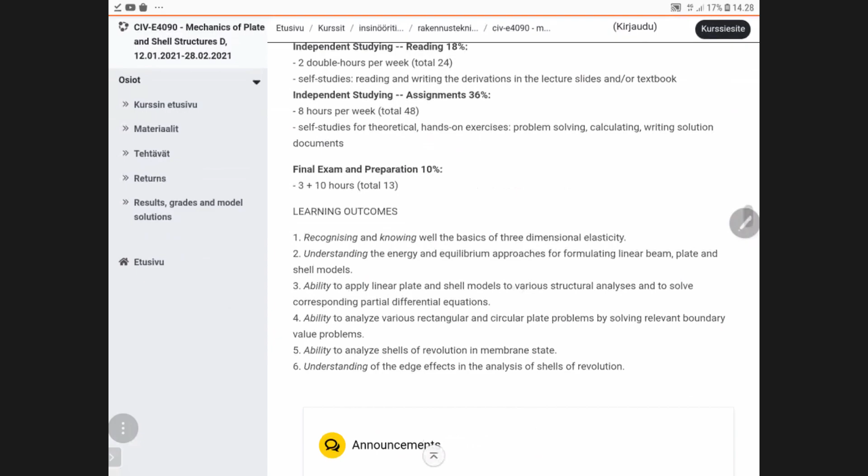And sometimes if we are not reducing that, then the course feels quite heavy to you. Okay, but anyway, now I presume that some of you study only 2 courses per period. If you study 3, then you better know that it's a lot.

And of course, the official amount of credits you get if you study every second period 2 courses, every second 3. But I think that in the past, at least, we used to study during the summer and Christmas period, so that some of the examinations you are taking there - this is the way to lower your workload during the periods. So this period system is a little bit heavy if you study only during the periods.

Okay, here the learning outcomes: recognize and know the basics of 3-dimensional elasticity. Of course, we start from that because all the structural models are based on 3D, and then we go to 2D and 1D. Understanding the energy and equilibrium approaches.

So 2 approaches, which I will explain a little bit later, for formulating linear beam, plate, and shell models. Ability to apply linear plate and shell models to various structural analyses and solve corresponding partial differential equations. Of course, hand calculations without any numerical tools - we are not able to solve too many or too complex problems, but enough, I think.

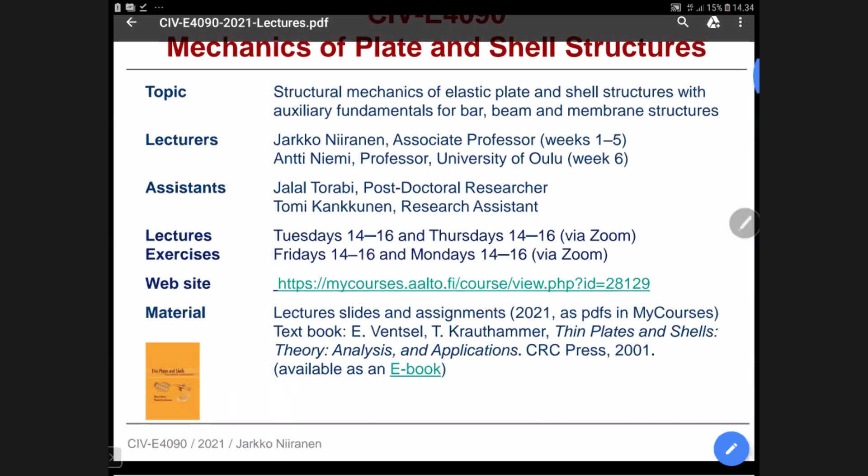So the rest should be clear. Maybe you can go through those on your own. And then once again, you don't have to listen to the lectures, you don't have to come to the exercise sessions. You can study on your own if you will.

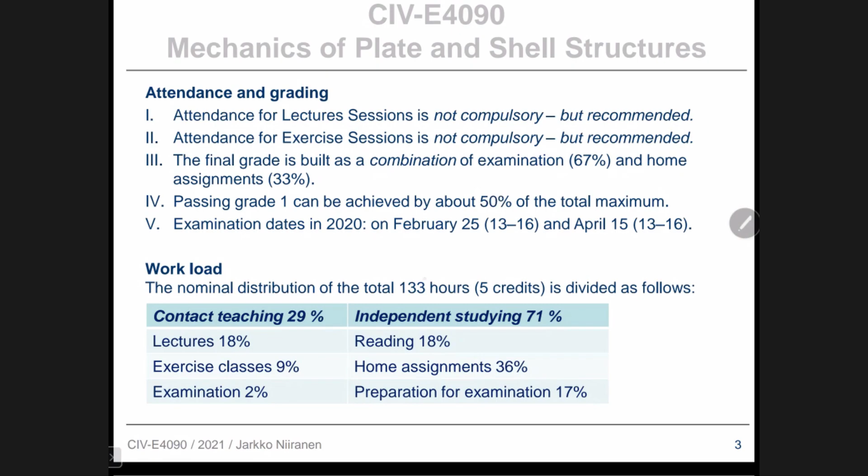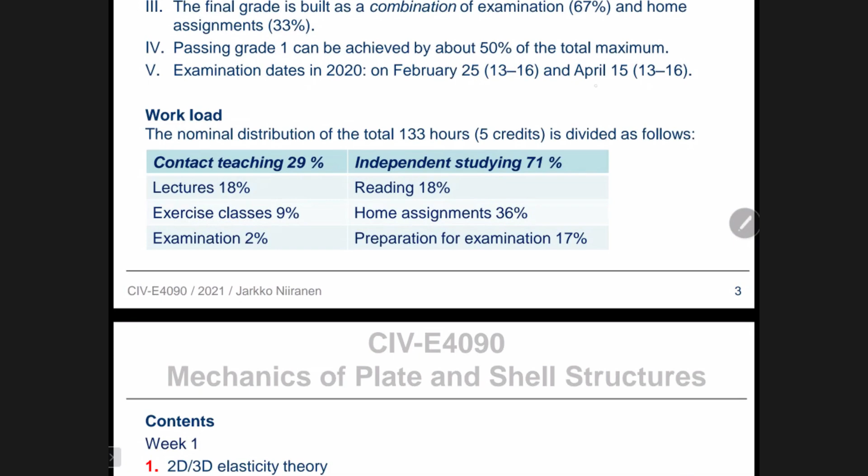It's a combination of examination, a bit more now since we don't have computer exercises, and assignments. Passing grade is a preliminary guess of 50%, but it always depends on how difficult the exercises and exams finally turn out to be. There's another exam in April, after the course. This is maybe should be updated.

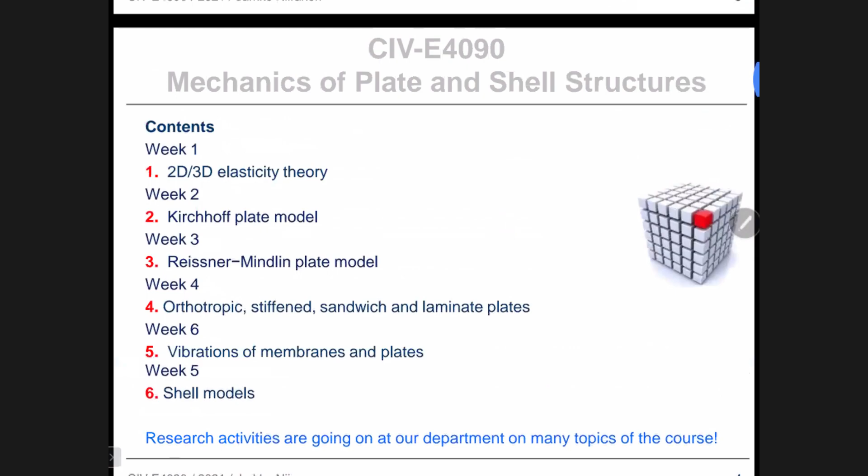Okay, and here once again the content. Now, do you have anything about practicalities? Anything to ask? Any questions?

Could it be so, like in the engineering computation and simulation course, that it would be a 50-50 split between homework and exam? Why do you mean that—could it be like that? Yeah, could it be? Well, of course it could be.

What do you think? How about others? Is it too much if the examination is—I mean, if the exercises are only 30?

Well, it's a good idea to increase exercise weight, so we have more chances to pass the course at least. But of course the target is not just to pass the course—the target is to get a good comprehension of the course. But yeah, maybe increasing the weight of the homework would be good.

Okay, maybe once I've tried something like this, I don't know, actually I don't remember anymore. But so what should it be? Should it be 50, or what should it be? What do you suggest—50 or 40, or now it's about 30, or was it a third?

Actually, I have one quick question regarding the homework. Is it okay to just use pen and paper and then scan a clear picture of the answers? Yeah, nothing else is required.

Some of you, even in the exam, used maybe Word or some other writing software, but I actually recommend using pen and paper, especially in exercises. Sometimes it might be difficult to read, but usually I think it helps in learning. There are even rigorous studies on the fact that using your hand increases brain activity as well.

Okay, but it's anything goes, so it doesn't have to be so formal, nice reports.

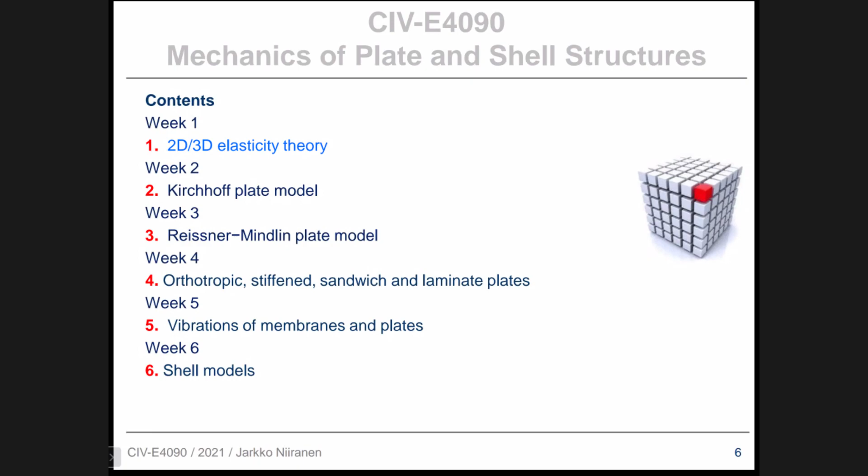Okay, let's go to the topic then. Is there still somebody who wants to ask? I think some of the exercises will be identical, especially now it's a very standard classical topic. Some exercises you just have to go through calculations people have done for let's say at least 50 or 100 years, some small examples, so you don't have to apply, you just go through things. Of course, in some exercises I add a little bit of a twist, so that you are not able to just copy the model solutions or others you can find on the internet or in textbooks.

Maybe I had it somewhere, maybe it's coming. Okay, let's see. Anyway, first we are going through the strong and weak forms for 3D linear elasticity. We are recalling a little bit, and then actually I should have added here 2D as well, and then it's coming, plane strain and plane stress problems.

These are the fundamental problems that are behind the membrane, plate and shell formulations. You should recognize the differences between the dimensions and understand the basic features, and have the ability to solve some model problems.

By the way, have you been able to download the book? Anybody tried? Yes. Okay, so it works. Is it so that you can download the whole book or just some fractions of that?

Well, you can download either, but the maximum period is 7 days, and after that the files are not working, you need to download it again, as you are borrowing it again. That's the online ebook.

Or type that book name into Google. Don't use any Aalto, Finna, or anything like that. Well, there's another free option, a PDF, yeah, you can find a cracked PDF definitely. But I think that when it came to us, I actually downloaded the whole book and it's still working. I don't know, maybe they have changed the license.

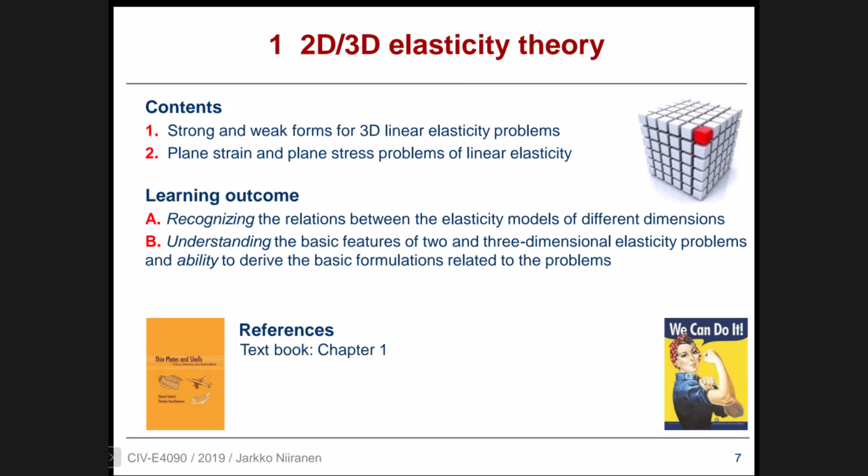By the way, remember always to use the VPN connection or some other connection so that you can get access to those library materials.

And then, of course, I just list here that we are relying on the basic course material, and some courses of bachelor's you have studied continuum mechanics. I don't know how much, depends on your background, but at least in Aalto we have one course, and then we have a course of, maybe I should have written here also the course of solid mechanics. So I think we have two courses. Of course, statics and dynamics is always kind of the high school extension, but it's not about the continuum, solid bodies, it's kind of rigid bodies.

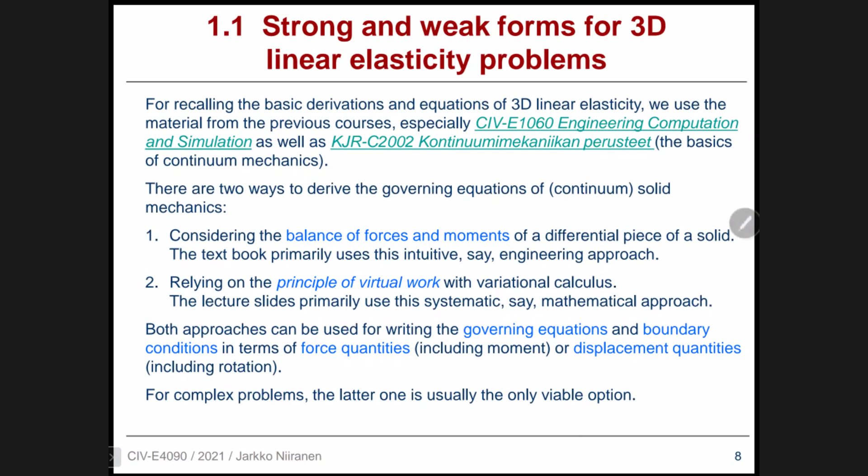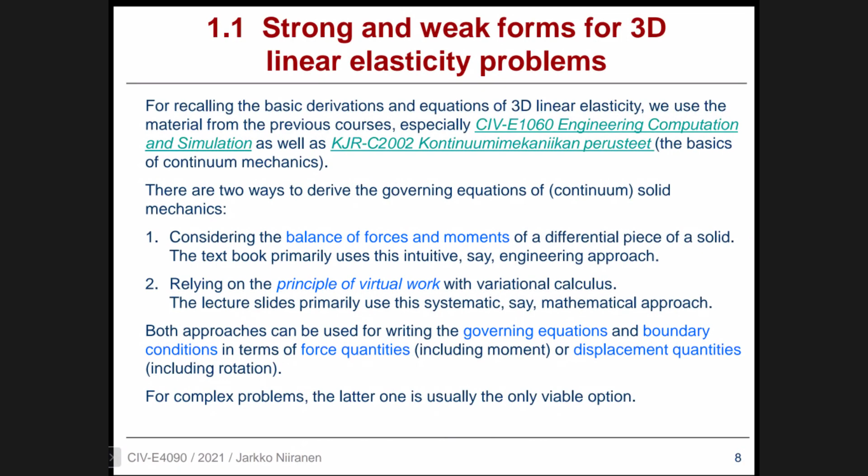And now there are two ways. I have now used number 2 here, and I'm using that in the slides, especially because the book is using number 1. So what I mean here, maybe I can, I don't know.

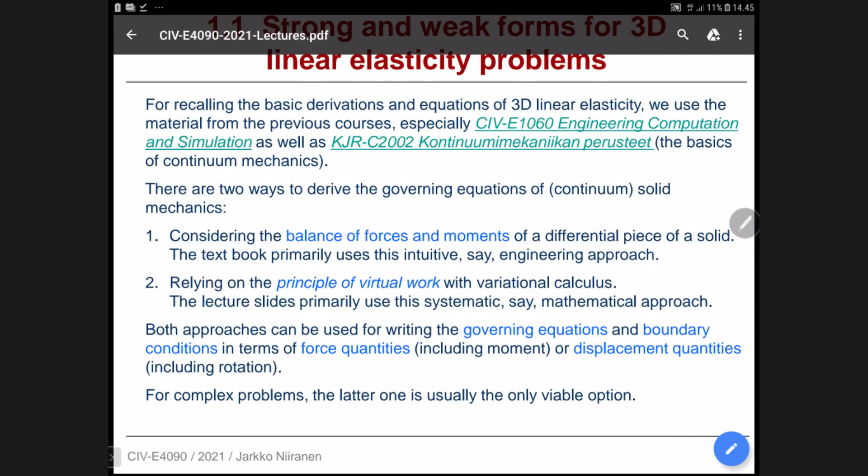Where is my drawing system here? What I mean is usually, like we did in some exercises, we draw this kind of dx, a short piece of material, and you can do it in 3D. And then you write balance equations and all these things, and then you say, okay, let's see what will be the differential equation.

And the other way is that we start from the integral form, and then we plug in or insert all the kinematical assumptions and things like that, and see what happens. So this is the way I'm using here in the slides, and of course both are possible, but usually in more complex problems the first one is not a viable option. It's too complicated, and you easily make mistakes.

Okay, so these are the two ways of working, and I try to build a link between these two during the lectures a little bit, to give you a direction. But when I'm giving you the reading exercises, you will get to option 1, number 1.

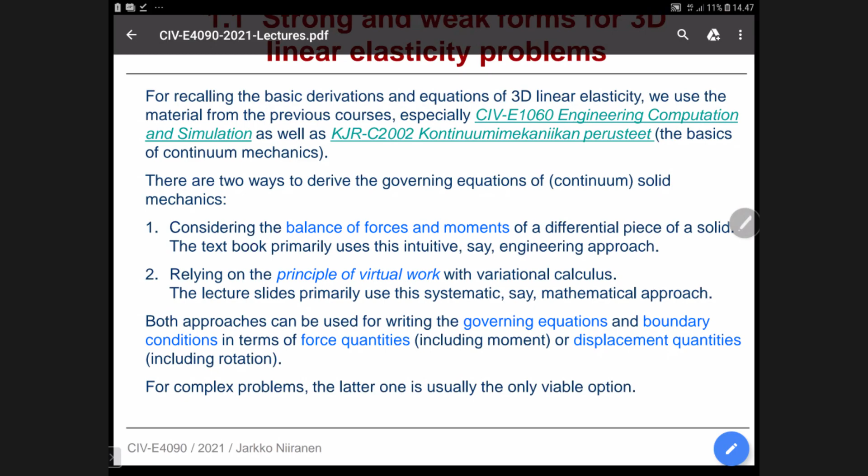Now if we go back to the previous studies, especially the basic course, what I'm recalling is that we were modeling something, and the physical problem is always the starting point, but it's very often too complicated, so we have to make some reductions. The first reduction is, let's say, that now you are here.

Let's say that you have multiphysics. In structural engineering, it's not very multiphysical stuff, but in general you have multiphysics in the problem setting. Then you go to monophysical, which is our case—of course it's only mechanics, but it can still be 4D. And then we go to 3D, and then we might go to 2D, and finally 1D in some cases.

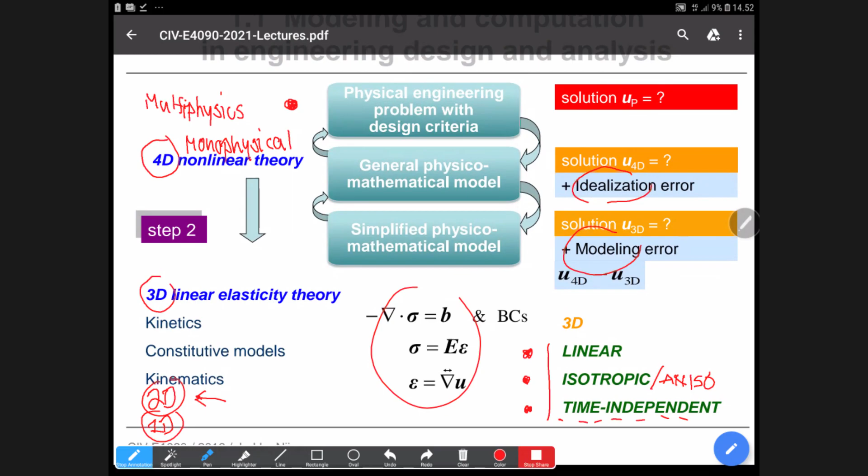Okay, so this is the concept, and now it's all about idealization or modeling error, nothing about discretization. Maybe in the end I'm showing you a little bit about some practical tools, especially for plates, where we use semi-numerical methods, but not true finite elements or something like that. Okay, so let's move on.

Here we are going to 2D, because we want to model plates, shells and membranes more easily than just as 3D bodies. One reason in the past especially was that we would like to do hand calculations, because that was the only way—3D problems, no way to solve before computers. The whole history of mechanics is full of different hand calculation techniques and different models suitable for those techniques for 2D and 1D problems. I think even the concepts of plates, shells and membranes are coming from this direction—otherwise you cannot solve anything.

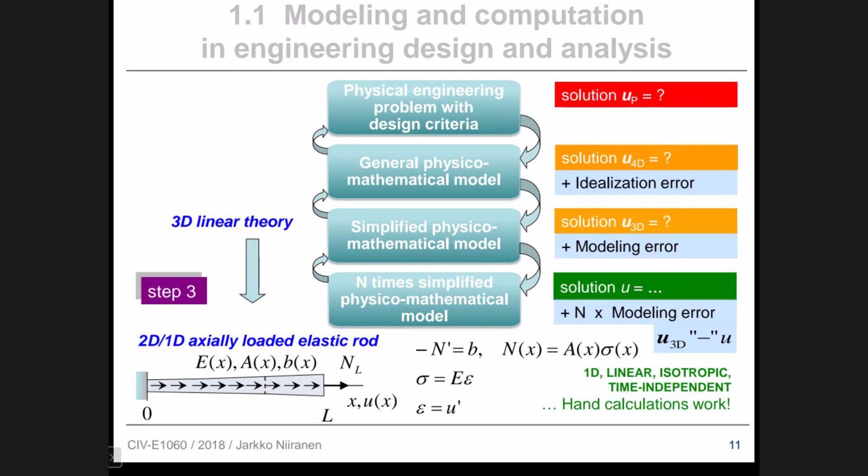Okay, then I'm recalling very quickly these, just before I draw one picture, or maybe after the break, explaining these, which is a nice framework. I remind you, it's about deformation, or motion when we have time, in continuum mechanics, and we usually speak about four issues: kinematics, which is about displacements and strains, and especially the relation between them.

And in 1D it's the easiest to remember. I think 1D, the bar problem, is a really nice example because we remember what we're doing.

And then kinetics—it's a little difficult to remember that both are kind of 'kine' starting, but it means conservation of linear and angular momentum. The conservation of linear momentum gave us the balance equation. If displacement and strains were there, then linear momentum gives us the balance equation. And the angular momentum—does anybody remember what that gave us?

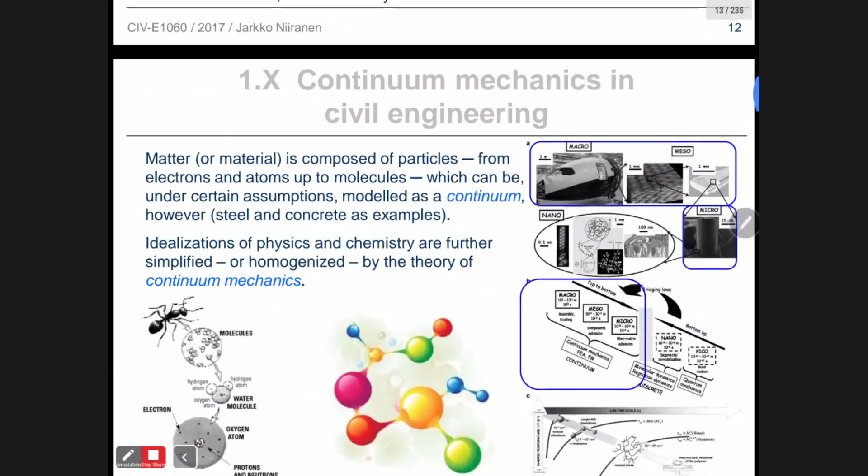Okay, so that's enough. And then what we have to remember is that, of course, now when we are dealing with continuum mechanics, we are usually at the macro or meso level.

And in civil engineering, especially if you're not going to materials, let's say concrete or wood as a cellular material, like you can see something here, then it's not about micro or nano. And so this is the kind of world where we neglect small details at the material level.

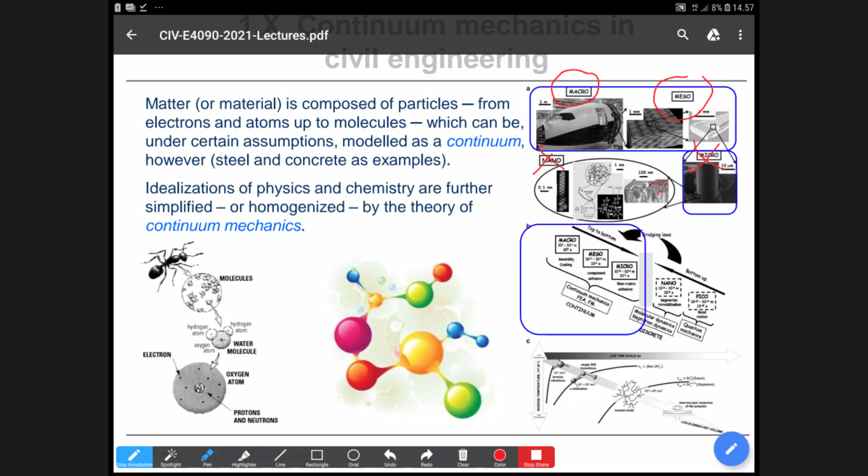Other small details we might take into account. Okay, this is just about that fact, and then here it's about the same, that we are overlooking, how to say it, I don't know. So we are kind of thinking about homogeneous materials and large scales.

And then we must be continuously differentiable. So we must be able to use some mathematical tools, otherwise we don't get anything. And then all materials in the sense that we can say linear elastic materials, plastic materials, so we kind of group different materials together. We don't say that this is continuum mechanics for wood, for concrete or steel, but from the phenomenological point of view, you classify them.

What I'm studying actually today in my research is so-called generalized continuum theories and numerical methods for those. And there the idea is that in some cases you should be able to take into account the microstructure in the material in a better way than just assuming that it's finally homogeneous.

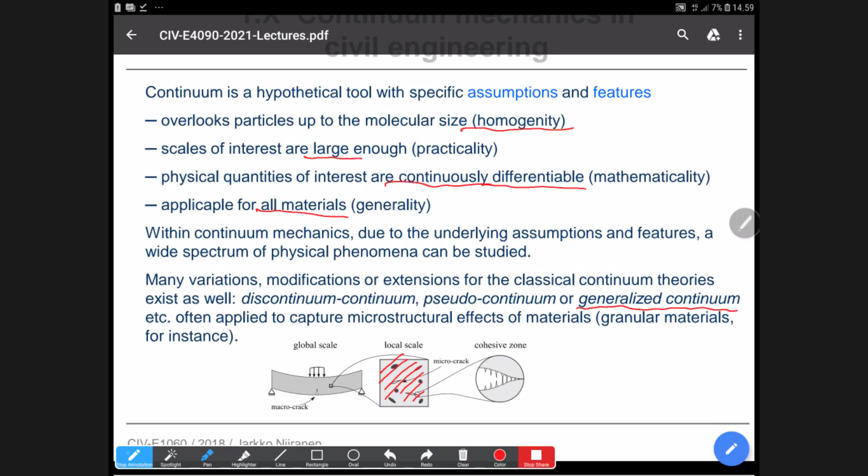Okay, let's go further. And then, of course, when we are studying continuum mechanics, you should remember that we are thinking about solids, but liquids and gases are practically following the same laws and all the same principles. Almost nothing is different. They just appear in a different form. Maybe something is a little bit different. But we are here, of course, focusing on these.

Now, for simplicity, elasticity during this course, and plates and shells, but also bars and beams as a background. And then the numerics comes into question during the next course.

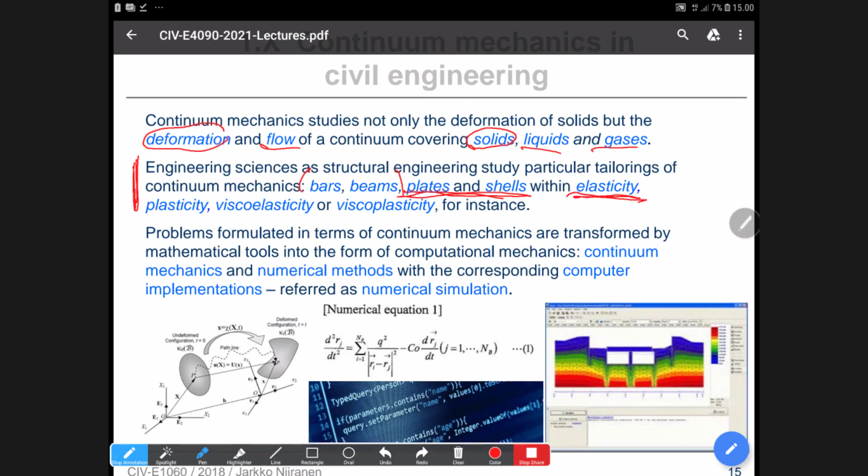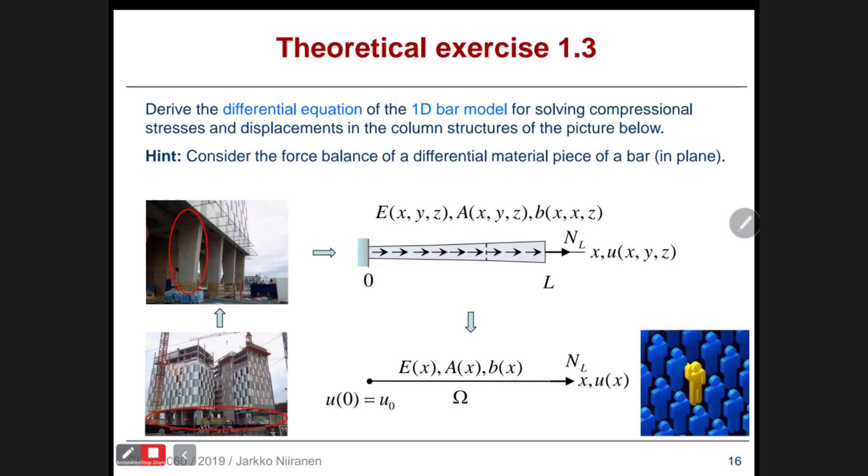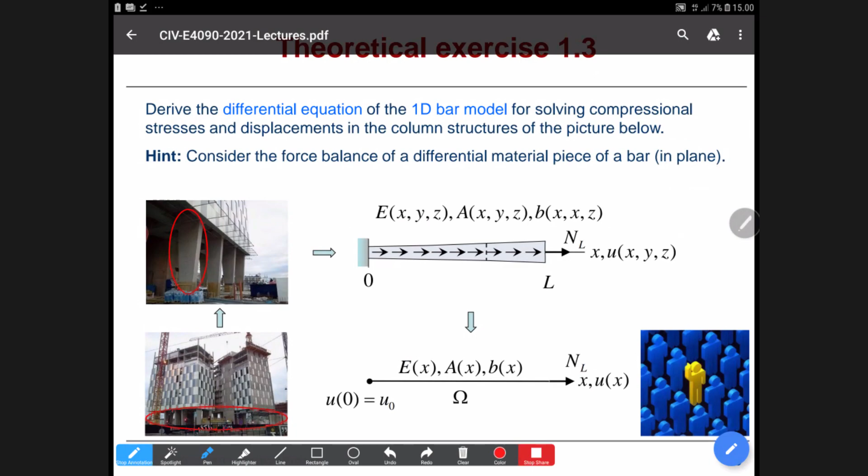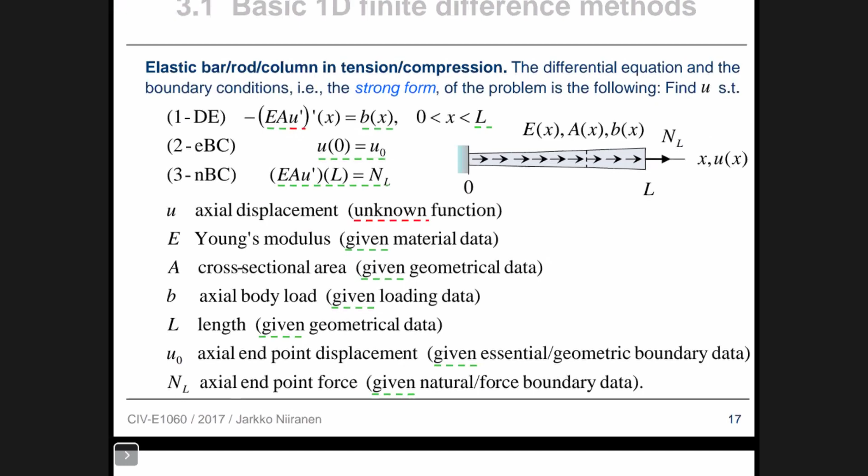And then if you remember, we already did something like this. We started from 3D, and then we derived a 1D model for bars. This is just one of your exercises, and now we will do something very similar for membranes, and then we get these equations, differential equations or weak forms. And that was one of your exercises.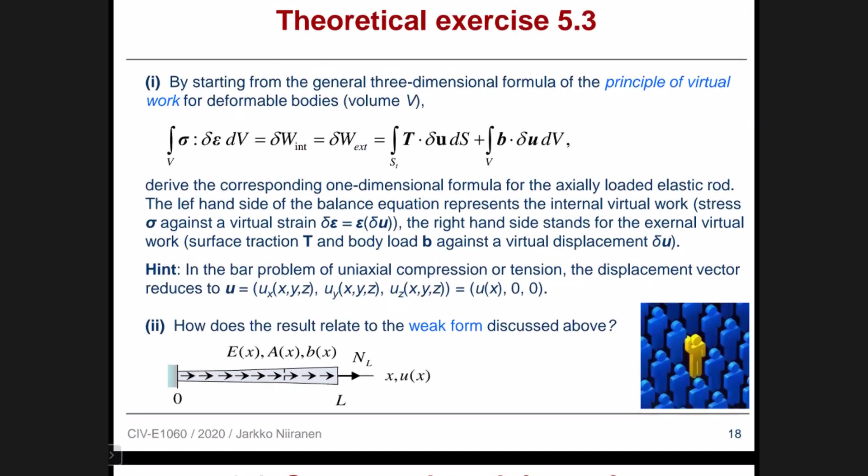So start from the 3D and then insert a kinematical assumption, which of course is not just a kinematical assumption, but it has some reasoning behind it. For instance, one reasoning is that this looks like one dimension is longer than the others, and it looks like the force is acting only in one direction. So you can say, aha, the displacement in the x direction is practically the only thing I'm interested in. And then the corresponding strains and stresses and so on.

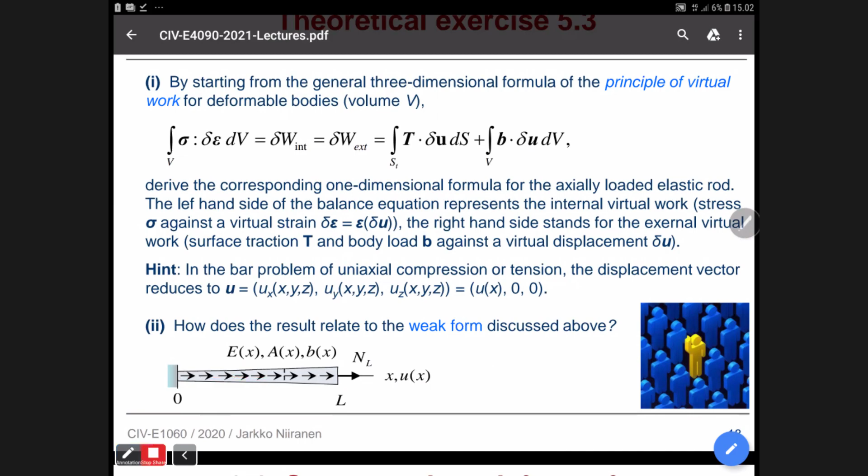But now before going further, according to this, I will draw a general picture where you can kind of see why and what we are doing. And then we go to the membrane, 2D, 3D membrane problems. Maybe here I'm going to draw, but let's have a break first.

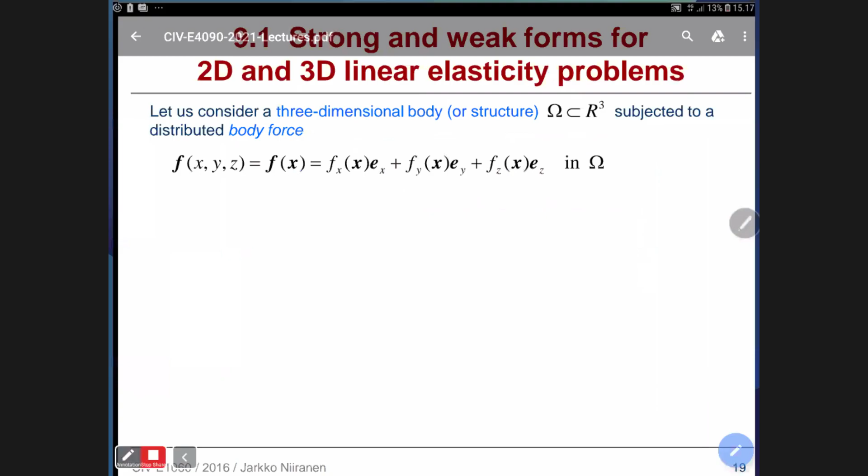Before going to the 3D descriptions and then to 2D descriptions, let's start with the basics, because maybe I should have drawn this kind of picture already during the first course, as this might help you. I was thinking about especially now when you have a force, which is usually the case. Of course, you usually have a structure, and it's 3D by definition.

And then you have a body force. Of course, you can have other forces as well, but let's think about those later. Body force, for instance gravity, you always have, so this is a good starting point. Then you might have some service loads - we call them service loads in civil engineering - internal and external loads of different kinds.

And of course when you have a loading, maybe it's a vector here, what do you want? You usually, from the practical point of view at least, would like to get displacement, because you know where it's moving, where the body is moving. Especially when you have time included, then of course you want to know - here x is x, y, z, and then time involved - you want to know the motion.

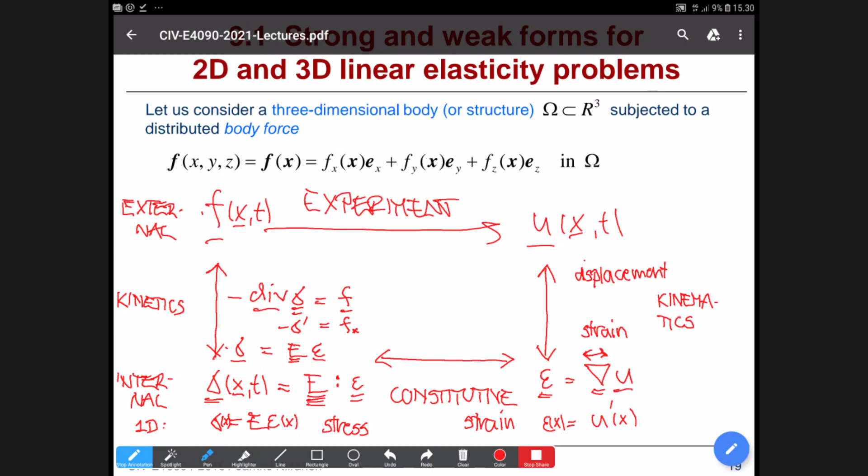But of course it doesn't have to be F. Oops, shit, now it's gone. Undo. Now it's there, back there. And then we are almost ready, I think. Of course, it's a little bit messy. You can draw a better one on your own.

But the idea here is that when we are given a force, sometimes, of course, you might be given a displacement and you actually have to find the force. But usually it's a standard way of thinking that you are given a force and then you get a displacement. You try to find a displacement, and of course, or you can even say that you're not interested in the displacement. You are given a force, but you are only interested in the stresses.

But then anyway, if you are going from, let's say that you are going from forces to displacements, you have to go this route. So you have to go here. First the balance equation, then you have to go here. You have to build a link between stresses and strains, and then you even have to build a link then between, because you kind of go from forces to stresses.

You actually introduce a new notation, new quantity, stress. Then stresses to strains, you introduce a new quantity, strain. And then you have to build a link between strains and displacements.

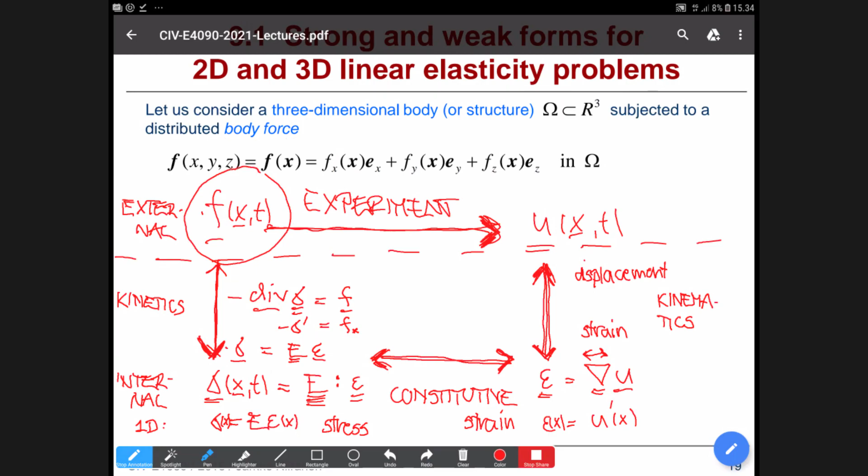And we still do it for some purposes, like calibration or validation of these models. And then what we have used here, if I go a little bit back, you see that I listed somehow here: kinematics and kinetics, thermodynamics 1 and 2, and constitutive.

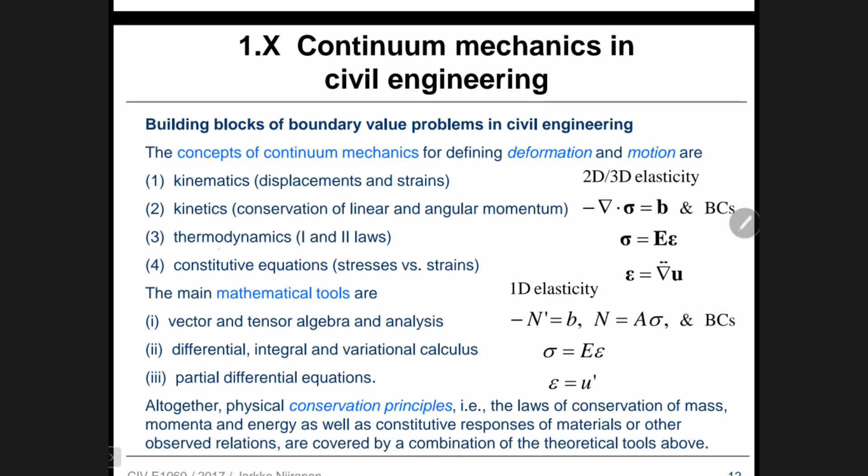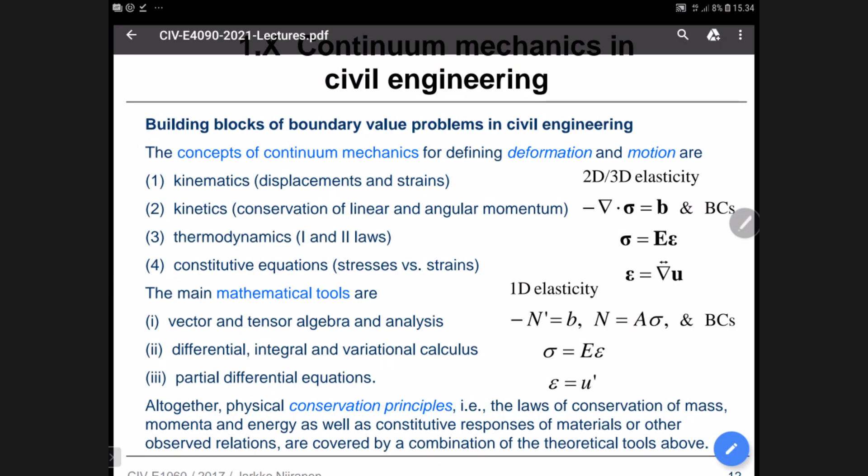Now it seems that thermodynamics 1 and 2 are the ones that are not kind of visible. Kinematics was the displacement strain. Kinetics was the balance. Actually, one of them was not. It was only the linear momentum balance. And then constitutive was there.

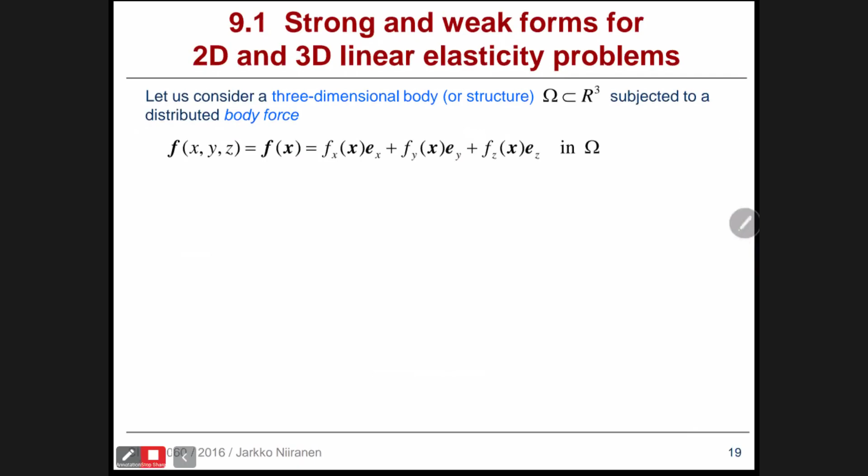But now if we go back, I should actually write here inside the thermodynamics 1 and 2. Somehow they affect here. And then in the kinetics, I should actually write here that sigma transpose is sigma. So it says that the sigma tensor is symmetric, and that comes from the balance of angular momentum.

We usually don't write it because it's kind of assumed that this is the case. But officially it should be written with the field equation, with the balance equation.

And thermodynamics 1, for instance, depends on the way how you number, but usually 1 is about this stuff here. So it gives you actually also the symmetry of the strain tensor, or something about the strain displacement relationship.

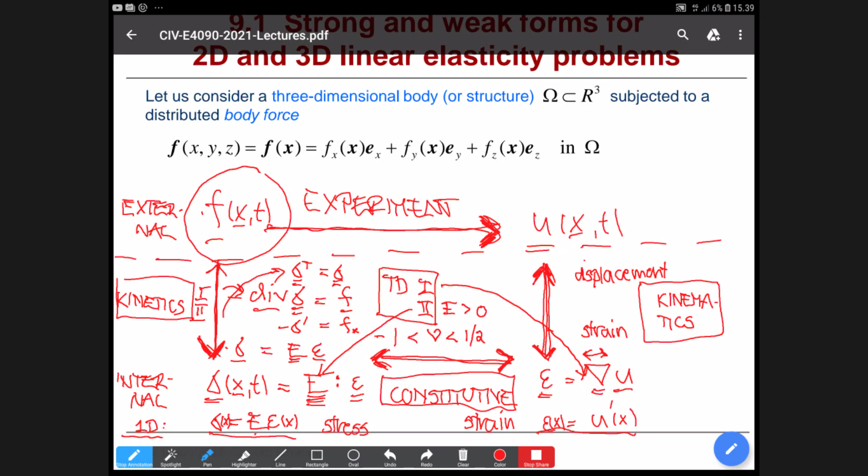And now we should go on. Maybe I clear this. No, it's gone. Then of course we should remember, because if we wanted to go from the force to the stress, maybe I simply recall — this is something I didn't do, maybe I should have done this as well in the basic course, because it seems that many of you have forgotten these.

Like this. So we have a point somewhere. Maybe we can have a 3D body, and then we have a point somewhere inside the body, and you're interested in the stress if this point is x, y, z — or in a 2D body, of course it's easier, it's x, y. And then you are interested in the stress at that point, and the stress tensor for all the stress components. What are those stress components? Just one example, to remind you about this. So x, y, z, and then the point is somewhere here inside.

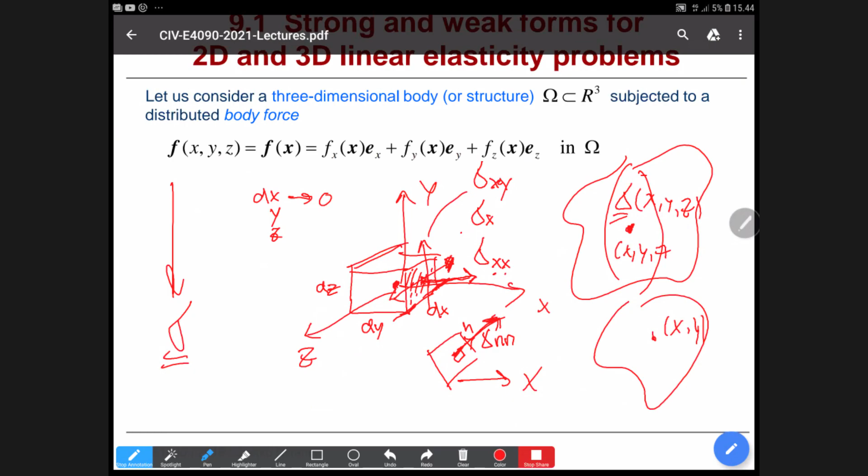So that was the way to define the stresses in 3D. And of course, if we are doing that in 2D, then it's another way. But it's just a simplification, or you define it a little bit differently. It's always better to think about a 3D body.

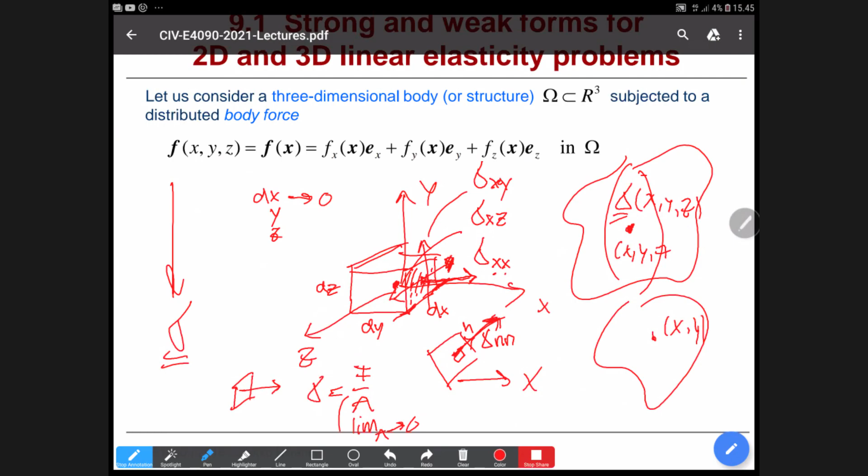Maybe 3D and 1D. Let's say that in 1D you usually define a normal, and then you say sigma equals f over a, and then you put here a limit, so that limit a goes to 0, and then you have the stress at a point. But here it's better to think about getting the whole tensor.

And now if I'm writing the tensor, we just collect all of these here. Of course the diagonal is the easy one, and then we have to collect the rest, depending on the style of writing it. Anyway, and this is symmetric.

So 6 components, and that's why we usually write it as a vector of 6 components. I don't even remember what's the usual direction, maybe this way, but there are many ways of writing it. Anyway, 6 components in a vector.

And then this is the stress, what we need in 3D, and then of course in 2D we remove the z ones, so this is what we get.

Then of course the question is, what are the practical cases? It's easy to show here in the matrix that this is 2D, but what are the practical cases? We'll go to those a little bit later.

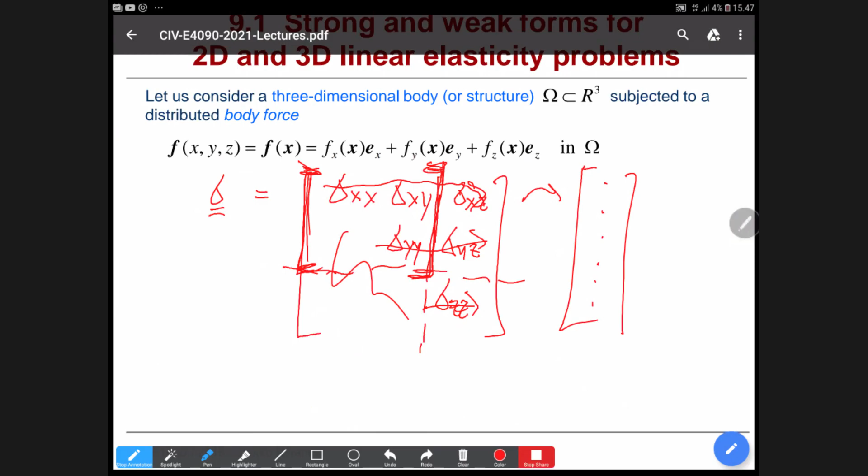But I will now go quickly through the theory of 3D, because this is just recalling what we've already seen.

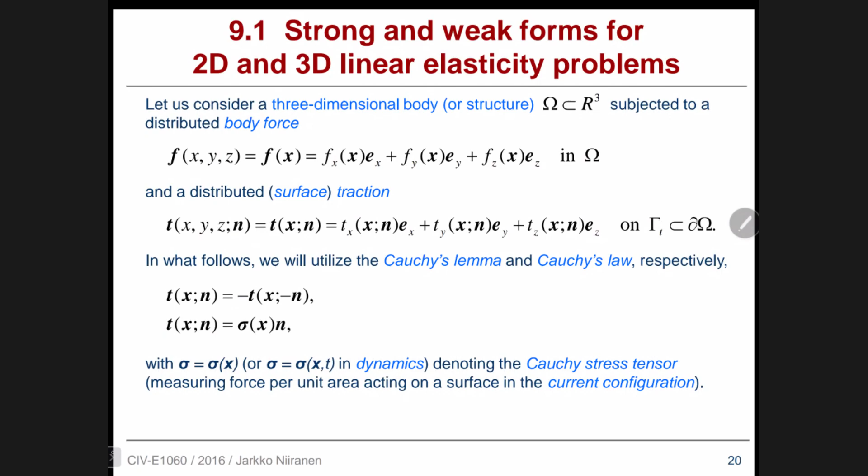But surface traction was the stuff that we give on the boundary of the body. So if body force was here inside the body, then the traction was here, so this is T.

And usually, if I go to 1D, we think about the NL being here, the traction, and body force f was here - the body force, which was of course axial body force in this case. But here it's a vector having 3 components, so somebody's pulling you from 3 different directions.

Okay, so this is the traction stuff. Then these are the theoretical things that we need to define.

And actually this one, the Cauchy's law, is practically related to the drawing that I just gave you when we were defining that facet stuff, and then it has a relation to the stress with the normal.

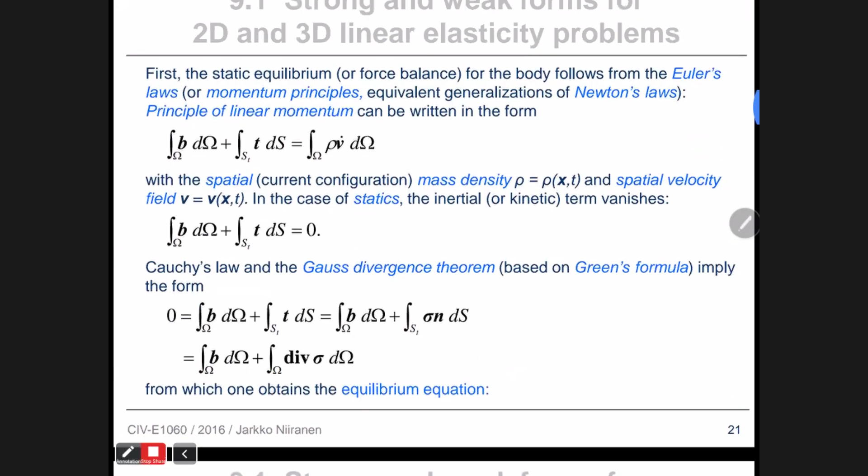And then yes, sorry to interrupt - your charge is 1%. Yeah, I know, I should maybe move a little bit. Okay, I'll move here.

Okay, now let's move on.

And the body forces, like I showed you here, we have tractions. I'm calling this body force here, and traction outside. The S_t was the part of the boundary where we have this traction, so it's this part. The whole body here is omega, and acceleration is, of course, inside the whole body.

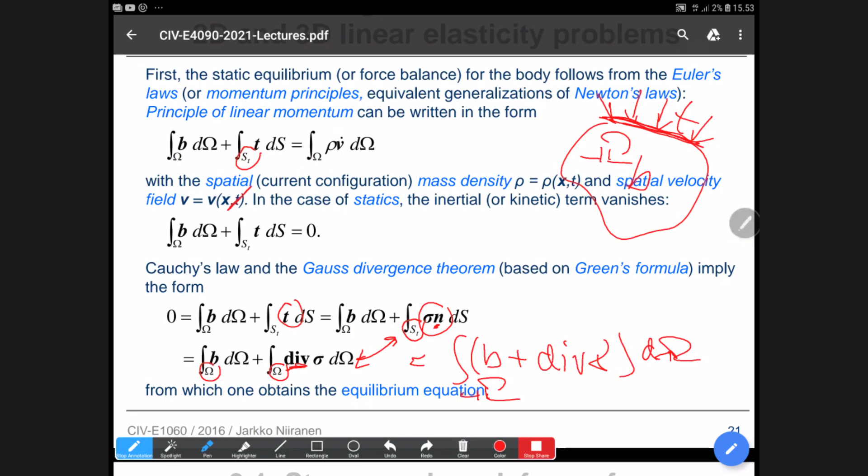Okay, and then we go on and get the equilibrium equation. So this is the stuff that was under the integral, and dynamics - now I kind of added dynamics afterwards here.

So if we have acceleration, that was the first - sorry, not that, but the principle of linear momentum. So that was kind of kinetics 1.

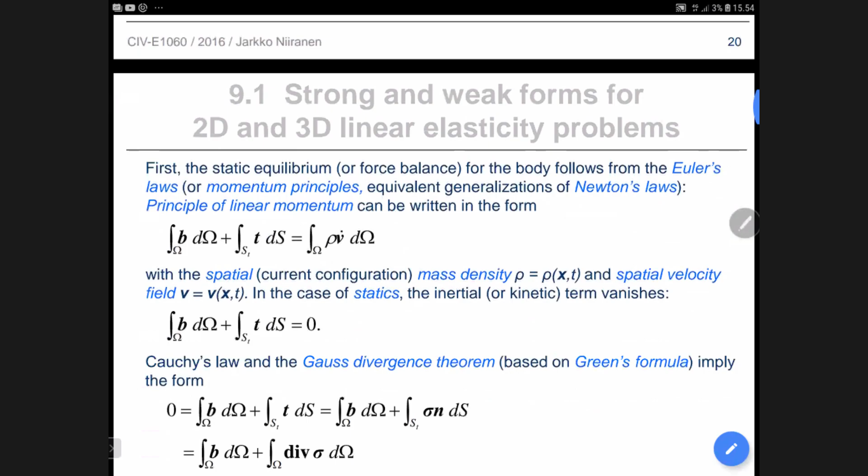And then we go to kinetics 2, which is the principle of angular momentum, and we write it, and we go on and go on, and it gives nothing but symmetry of the stress tensor. Of course it's a little frustrating, but this is what it gives.

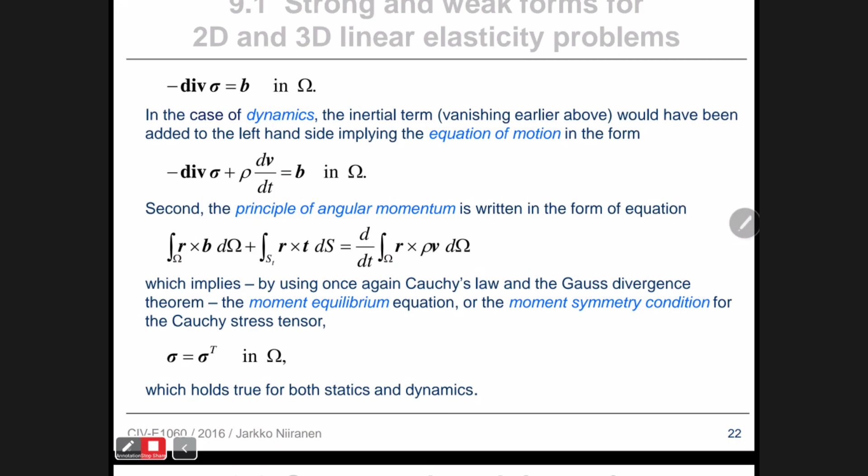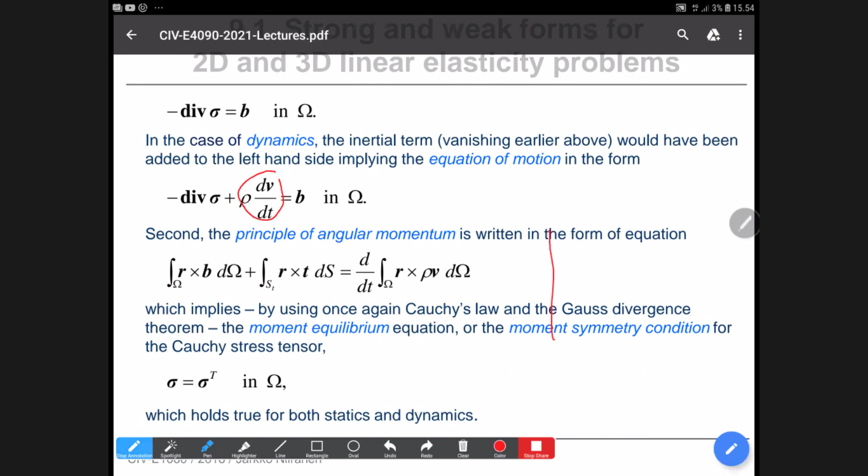Okay, and then of course we can do all of these things - if you remember what I drew you, it was this part - and actually we don't have to define sigma equals something. We don't have to define epsilon equals something yet. We have done all these things for stresses only.

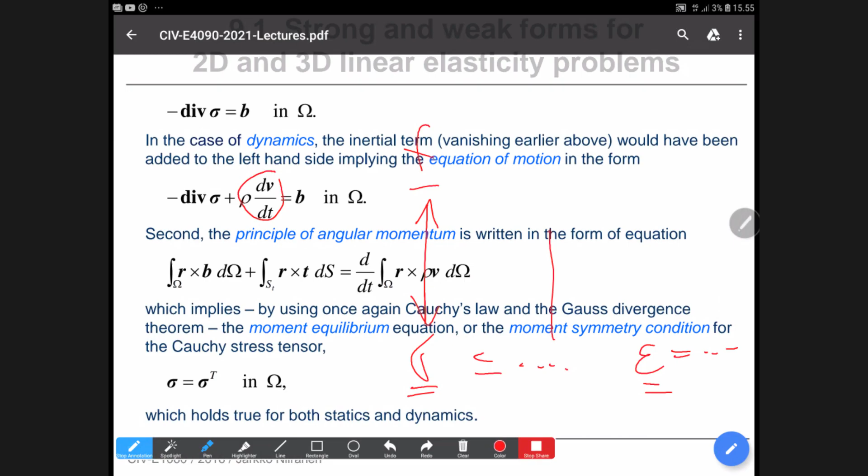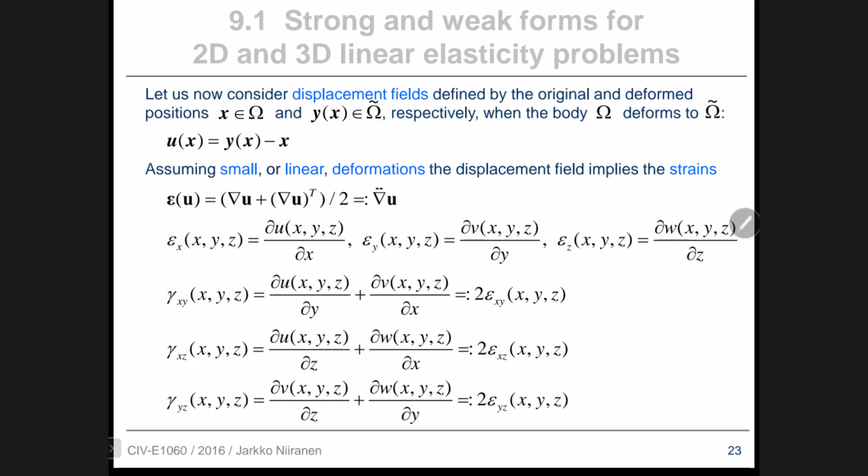But then of course usually we want to go further because we want to get displacements as well and strains, and that's why we define, of course, displacements. It's the difference between two positions, and then strains - and now I'm using linear deformations.

If you remember, if I'm adding here something like plus one half gradient u times gradient u transpose, or something like this, plus blah blah blah - you can see that this is nonlinear in the sense that it's the second power, practically the second power of u prime, and that's a nonlinear strain.

And this is something that you need to take into account in buckling problems or large displacement problems. But when displacements are small, we can say that this is zero.

It's like a Taylor series where you only include the first terms. In a Taylor series, of course, you have something like u0 plus gradient u plus one half gradient u squared plus blah blah, and then this is the term that we take into account, roughly like this.

And then we can also define - actually when you read the book, you will see how we define these single components very carefully, just to understand that.

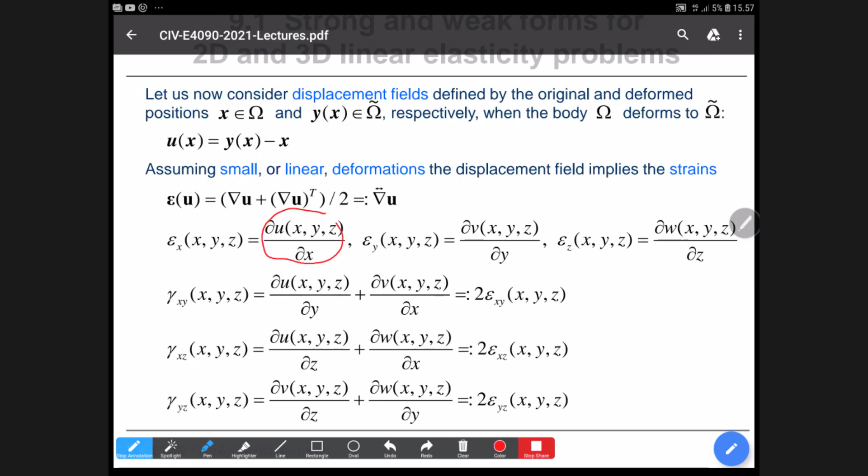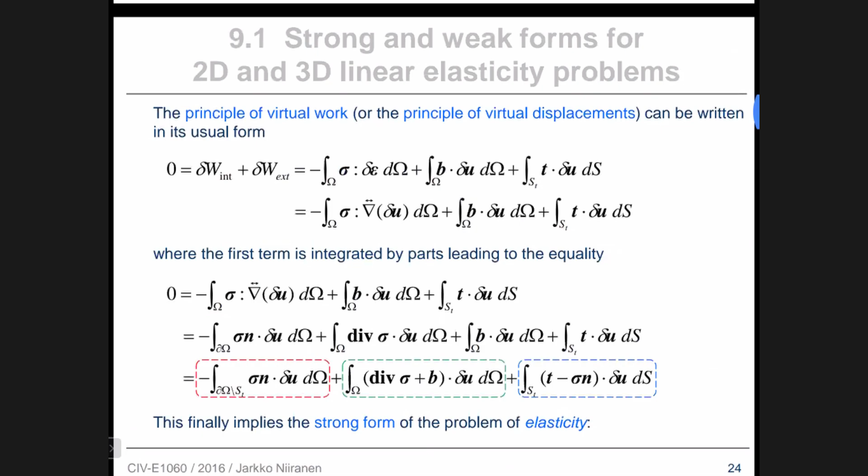And then the principle of virtual work was kind of the balance equation. So we are writing the balance like this, not thinking about a single piece of dx and writing forces and moments in many different directions, but we are using the integral, internal and external integral form of energies.

This is the strain energy, this is the body loading energy, this is the external loading energy. And I'm remembering that epsilon was just the symmetric gradient, so I'm using the kinematics. And then here from the kinematics, what we are doing is integrating by parts, so this goes here, and then we are splitting these integrals and so on. But I leave this to you because it's already been covered, and I will maybe include one exercise where you have to do something for this.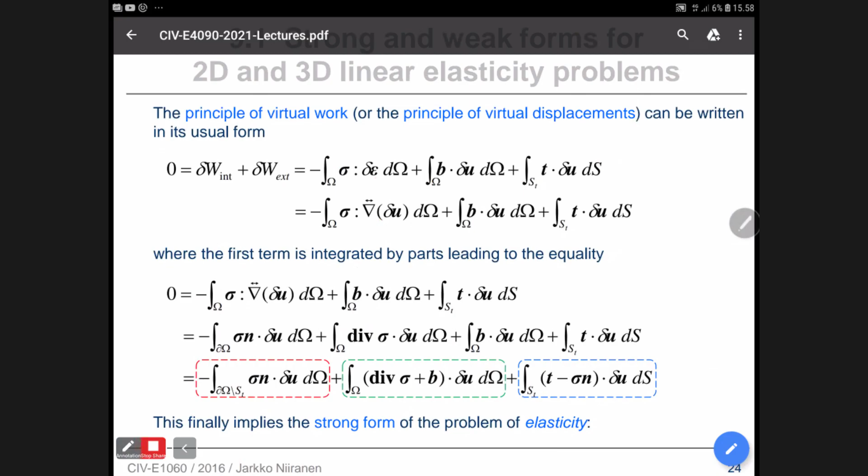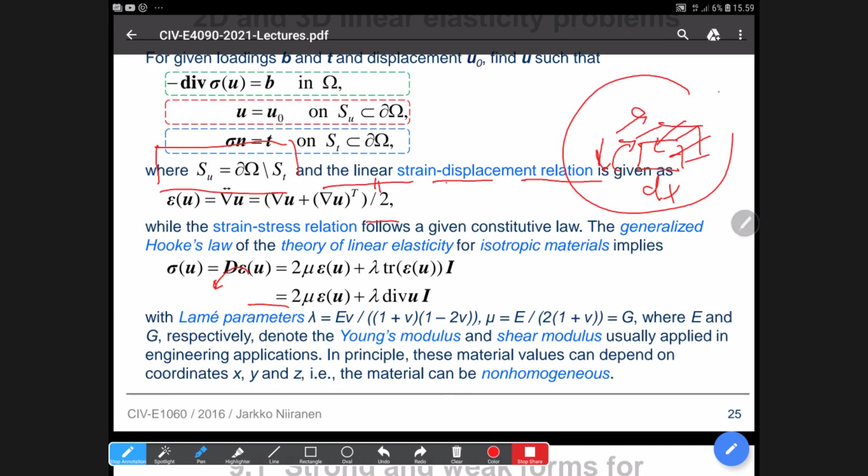And then this gives us the strong form, so the balance equation. Of course the balance equation, we could have got from the balance of a differential piece of material, but now we are getting it from the integral of energy.

Whenever you get something like this, I think it's good to write it in 1D form, and then it was something like this. It's always good to practice this, and this one of course was the same as minus EA U prime prime equals B. It's always good to practice this 1D bar problem, just to get the idea or put it back to the basics.

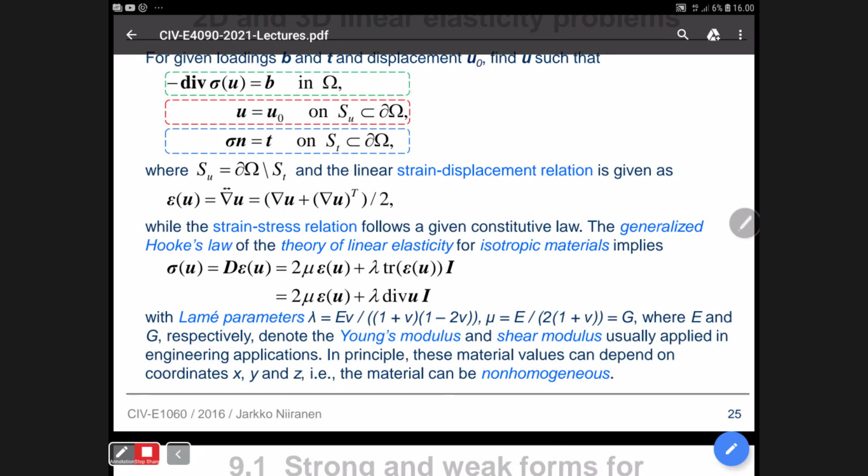And then in linear elasticity we can also write Hooke's law in this form, which is a little bit different, now without the matrix, like this. Maybe the weak form I'm skipping here.

We have just studied that, and then finally I remind you about the 2D plane stress, plane strain.

This I'm giving you as a home exercise, but on Thursday I'm continuing from this, and I'm giving you some reading material, and on Thursday I'm also calculating some 2D examples, because those I will give you as home exercise too. Usually I try to do it so that the Thursday lecture I give you some exercises. Many of you during the basic course wanted some example exercises, so now I'm giving those at least on the second lecture of Thursday, maybe the second hour, or even almost the whole 2 hours, but usually maybe only one half.

So on Thursday, continuing from plane elasticity, plane stress and plane strain, we are thinking about practical examples: membranes, plates, loadings like this and like that. We might also have, let's say, a dam or a wall like this, where water is coming from this side, and it's a long dam going very far, and you would like to analyze only one cross section, because the loading seems quite uniform in this direction, just a long straight line.

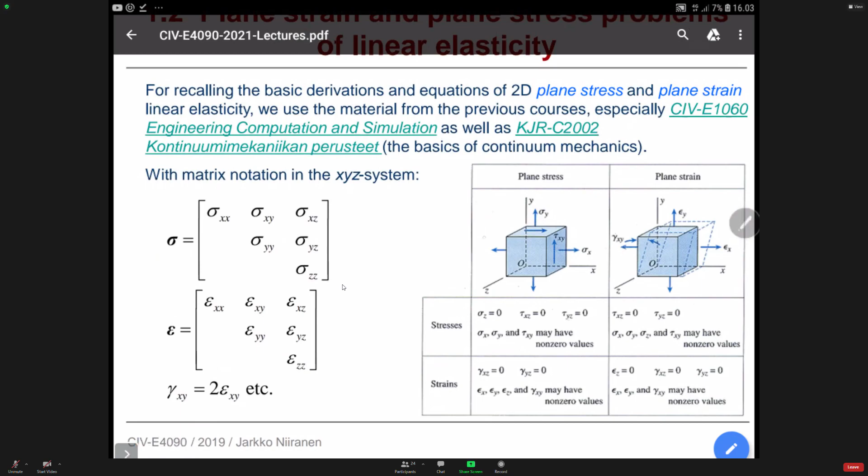So these kinds of things, we are going to more practical issues on Thursday. Do you have any questions now? No questions.

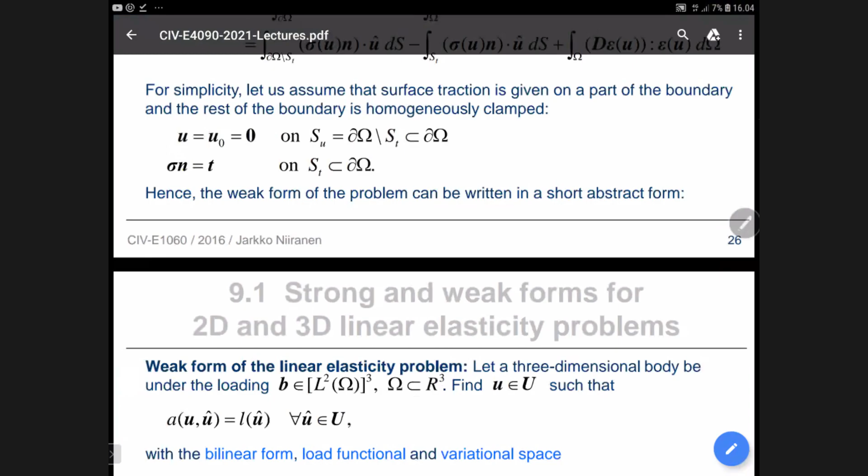Actually, I have one question regarding this angular momentum — how the partial integration works. I guess I could Google it, but do you maybe have some textbook material, or material in older courses where it's shown in more detail? Okay, yeah, I can give you some material, or even give you a partial solution and ask you to finalize it, or as an exercise, but yeah, I can show you how to do it. I think it might even be in the book, I have to check.

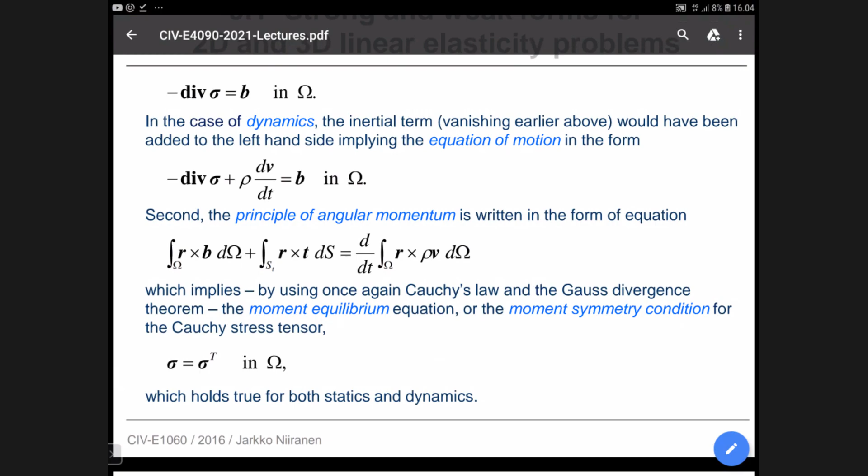Usually I skip it, it's skipped because the result is not so interesting. Yeah, okay.

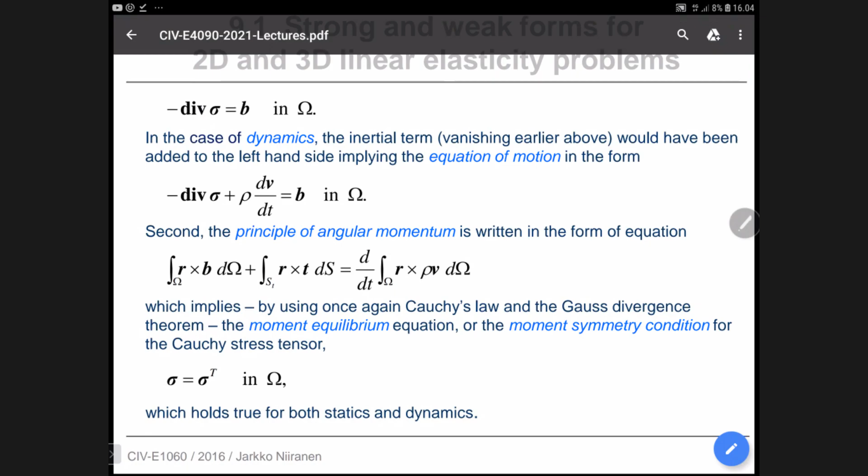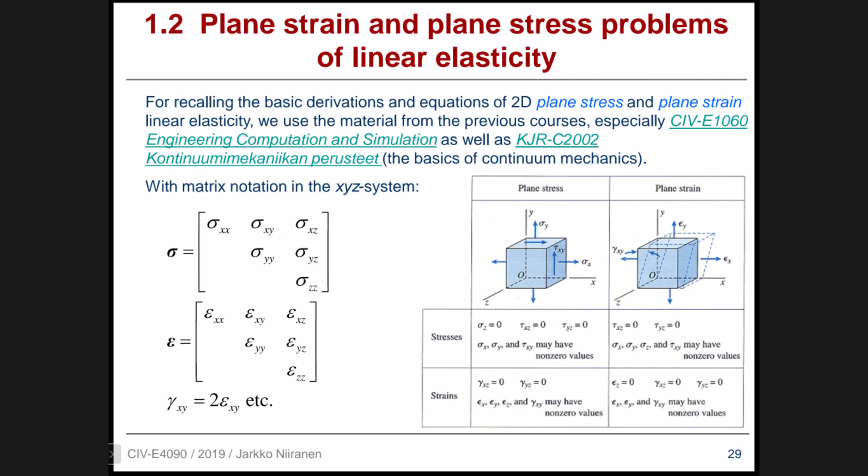So if you don't have any other questions, we've recalled the 2D, 3D, and some basics, let's say even fundamentals. I'll give you some related exercises and reading material, and we continue with the 2D problems on Thursday. Okay, so let's stop.